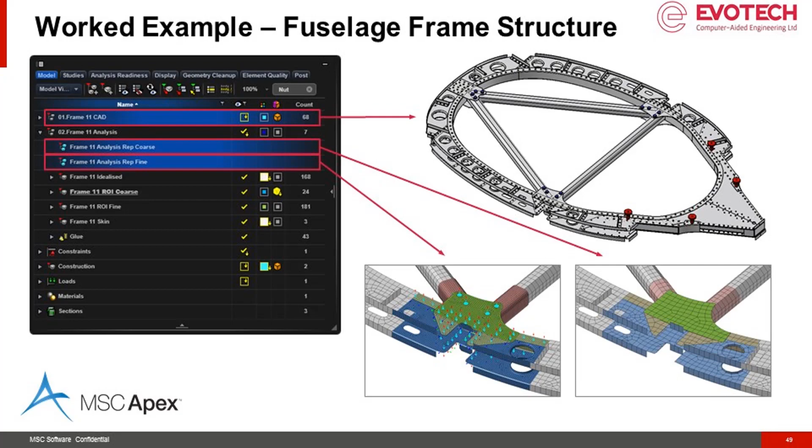We'll also look at the concept of a model representation, which allows for the build and analysis of different fidelity models in a single Apex database.

In this worked example, we'll go through a number of key stages. Stage 1, Model Assembly Definition. We'll demonstrate how complex CAD and model assemblies are imported, created, manipulated and viewed in Apex. Any parent-child entity, such as solids and mid-surfaces, respects the assembly architecture to allow ultra-fast manipulation for large models.

Stage 2, Sub-model verification. We'll look at how a discrete part is defined within the assembly structure for model checking and verification. Resultant Solve uses computational part technology to integrate analysis output into a full assembly level solution.

Stage 3, Full assembly verification and analysis. We'll look at sub-assembly integration and solve performed at many levels within the product hierarchy. Connector technology such as glue contact allows full model assembly for ultra-fast verification, analysis and or export to external FEA technology.

And then finally, Stage 4, model representation. We'll look at discrete model representation such as a coarse loads model and or a fine detailed joint definition, which allows models with different fidelity to be contained within a single Apex database. Results output can also be generated and assessed, which respects each model representation.

Okay, so we'll get started with the model assembly definition within Apex and look at some imported geometry. In the Apex environment, simply browse to the location of the geometry. We can bring in a single file or multiple files, in this case the frame 11 step file, which contains all the model definition for the assembly that we wish to analyse.

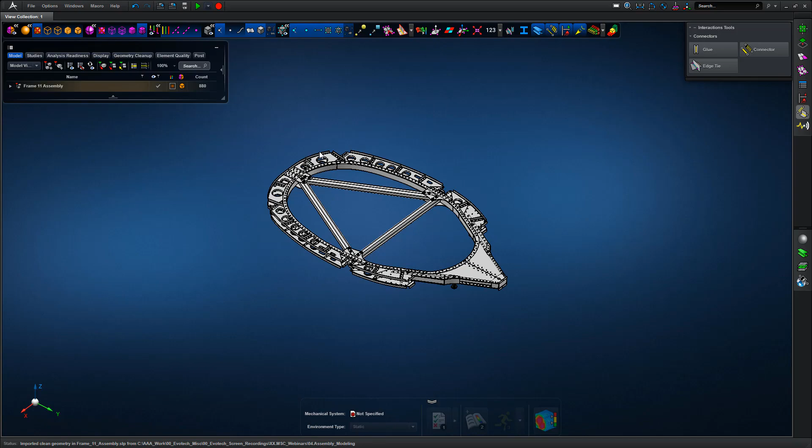So turning the solids on into view, as it were, we can see the full extent of the model. So we've got a typical aerospace thin-walled shell construction with lots of rivet, bolt and fastener detail in there, making up the full model definition.

In the model browser tree we can see we've got over 800 unique sub-assemblies, so a pretty complex, large model. We're going to use the information in the model browser tree. We're fortunate in the sense that the CAD definition has been generated very nicely with discrete names per entity or sub-assembly, so we're going to use the browser search function to pick out those entities and remove them from the structural assembly, as it were.

So first of all, we're going to create a new assembly. We're calling it fasteners. We're going to ultimately take out all of the redundant fastener definition for this first level model, and just leave us with the structural entities.

So based on the search string, we've got lots of split pins first of all. Using a split term within the search string, we can cut those entities out of the original assembly and then paste them into the fastener definition, or fastener container subassembly, to simplify the model.

So we're going to repeat this. We've now got rivets, so we can again highlight them with the search term, cut them out of the main structural assembly and then paste them into the fastener assembly, and we'll repeat that for the remaining fastener entities.

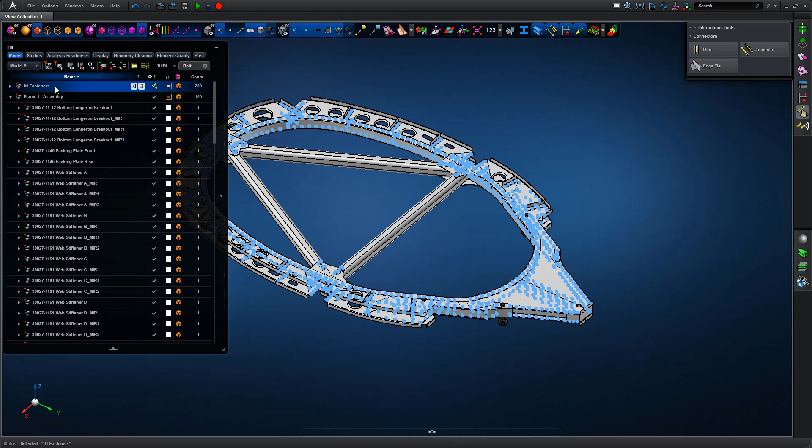We've got bolts and other fasteners in there which we can just cut out and move into the fastener assembly. So it's just a simple way of simplifying the overall sub-assembly.

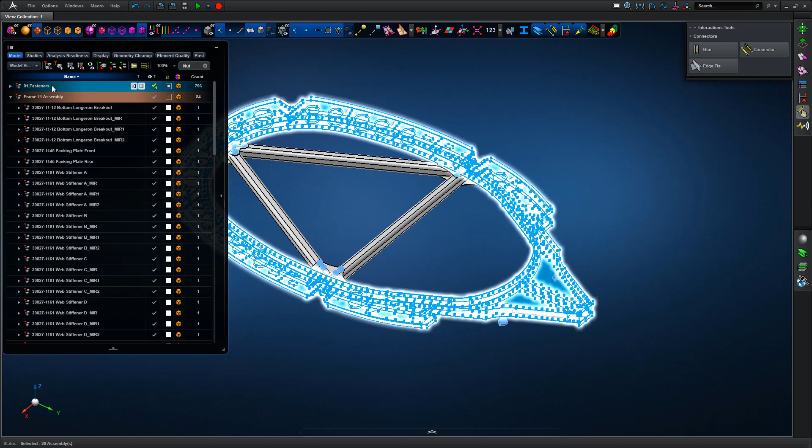We can do this by picking from the user workspace from a display perspective, but because of the search terms and the way the CAD geometry is set up, the assembly set up, it's very straightforward to manipulate this geometry, or the subassembly architecture, into a manner that we can control nicely.

So we're left with 64, I think, structural entities which make up the structural parts, so we can just cycle through those in the model browser tree.

And if we change the color of the fastener assembly and then just look in the workspace, we can see now we've got things like split pins, nuts, bolts and rivets all highlighted in red, and we can effectively remove those from the assembly architecture to make our modeling and analysis task much more straightforward.

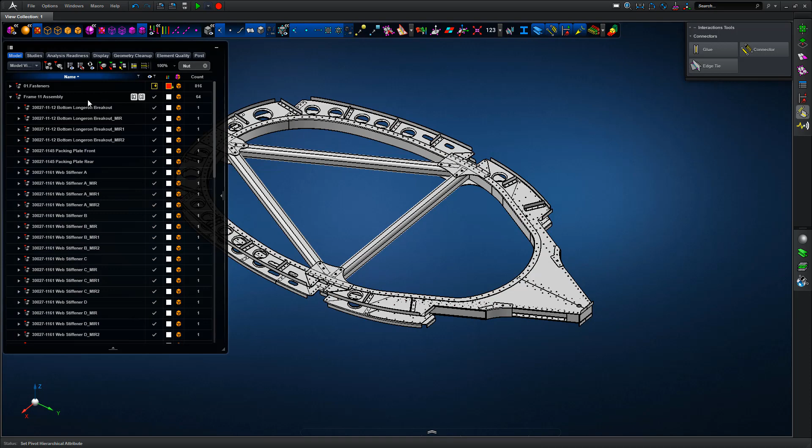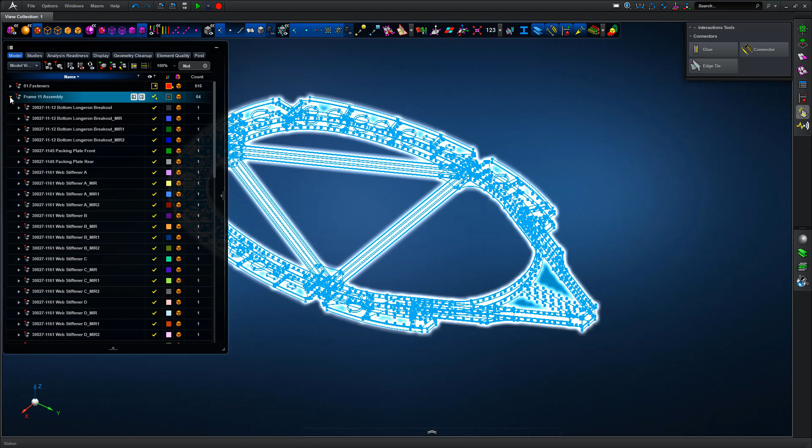So we take those out of view, and then we just show the frame 11 assembly, which is going to become our structural target for the structural model build, and we've got all of those structural components highlighted. We can auto color each entity within the tree to give us a unique color per part or subassembly, giving a nice simplified display of the overall definition.

Looking at a particular part, we can hover over it, right click and use the option center in browser, which takes us into the specific tree location showing a subassembly with a part underneath it and a solid body contained within that, so we can interrogate that particular part.

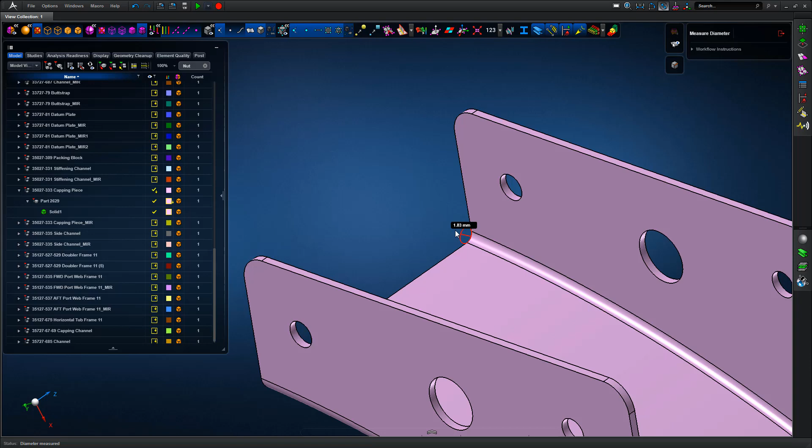In this case we're going to use some of the measurement tools to measure a fillet, and we'll use that dimension for a subsequent defeaturing operation, which we'll be performing on the full assembly.

Remember, we've taken out all the fasteners, so we're effectively reducing the complexity of the model, or simplifying it, and we can see how some of those fillets are controlled in specific areas of each model.

Once we've got an idea of the geometric dimension, we can defeature all of the subassemblies in one hit. So select the entities from the model view space, and then go into 3D fillets.

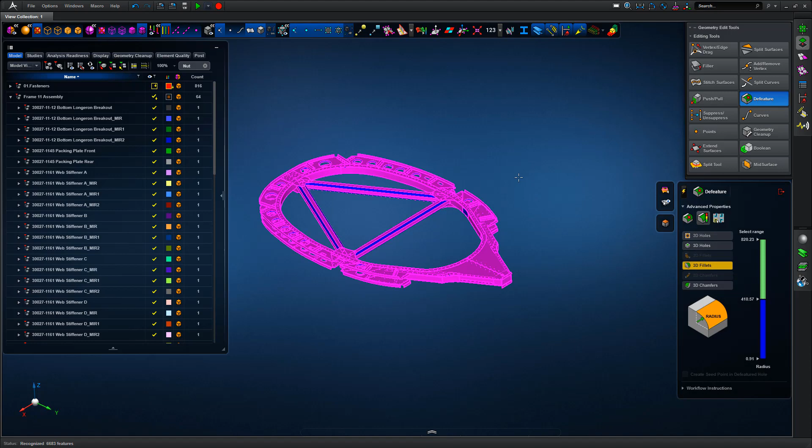We can see in the fringe on the right hand side that Apex has highlighted two sets of fillets, some coloured blue, some coloured green, so we can change the range dimension, making it more appropriate for our defeaturing operation.

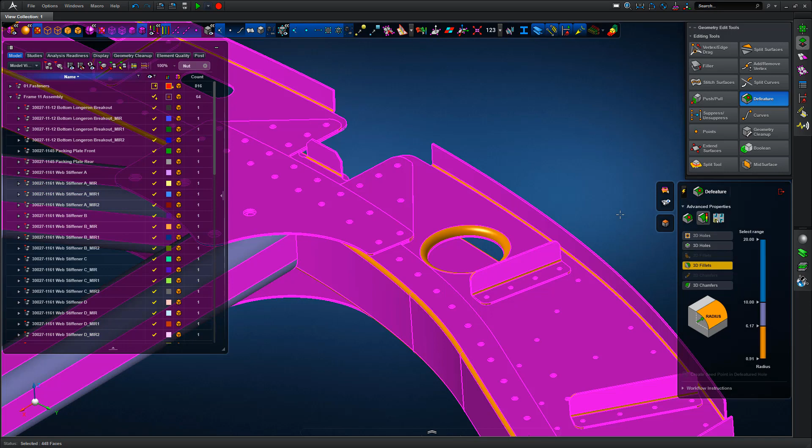We're going to set a control with 7mm in the range, so any fillet larger than 7mm, such as those on the struts shown on the left hand side, will be maintained within the model, and any features less than 7mm radius will be removed.

Just highlighting those in orange, then middle mouse button to accept, and Apex runs through, cleans up the geometry and defeatures all the fillets of less than that chosen dimension.

So it takes a little bit of time to perform the operation, and then we can come out of the defeature tool and see what we're left with in terms of the overall geometry.

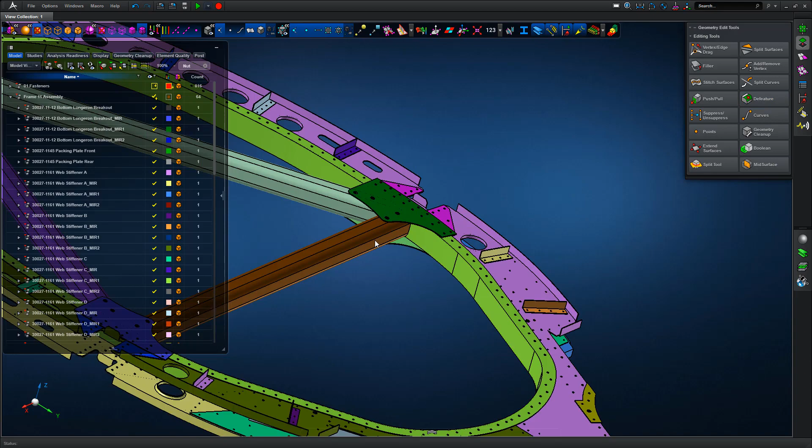Zooming in, we can see that for a couple of those regions the fillets have disappeared, and this again makes it a simpler operation for the mid-surfacing we're about to perform.

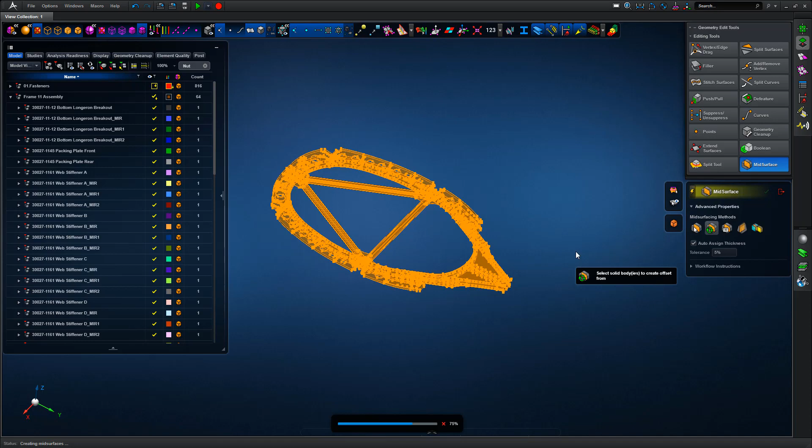So we're going to use the mid-surface or single thickness solid with the auto assign thickness checkbox turned on, and perform the mid-surfacing operation. Apex creates the mid-surface and also the subsequent shell thickness property based on the original solid definition.

A very nice way of working quickly with the model, and we can see a fringe plot of the resultant thicknesses.

We can turn off the solid and show the free edges. These are the mid-surfaces that have been created, and each mid-surface is contained within the parent subassembly part where each solid was defined that was used for the underlying mid-surfacing operation.

So we're just going to center it in browser, look at the discrete part definition, and then move the adjacent mid-surface that's created, looking around in the model browser tree for the adjacent paired surface.

Just turning on a couple of parts to get the entity that's required. So there we go. Currently, those surfaces, pink and green, are contained in two separate subassembly collectors.

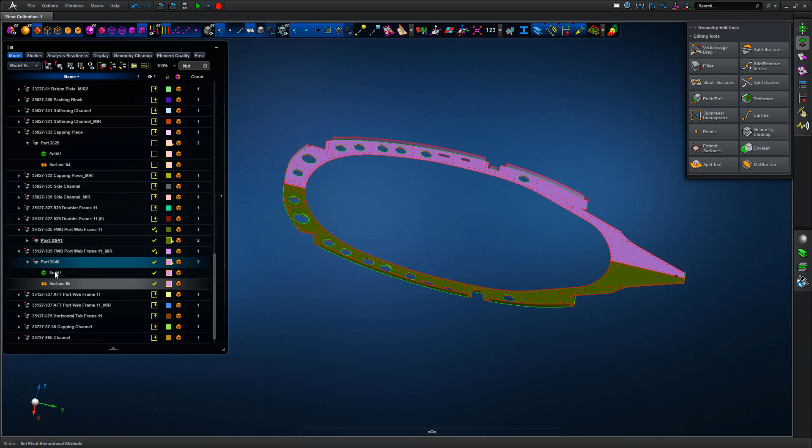So we're going to copy, cut and paste the solid and the resultant mid-surface into a single subassembly. You can see that by the fact that both entities are now the same colour and contained under that unique subassembly. And if we put the full assembly on, we can see how that manipulation has been defined within the full assembly.

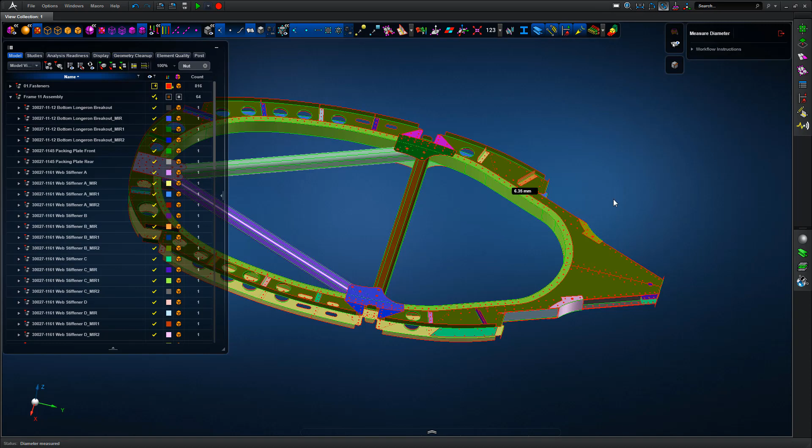Measuring some of the hole geometry, we get the hole diameter of 6.35 millimeters, and we're now going to defeature all of those surfaces to remove the 2D holes, again less than 6.35.

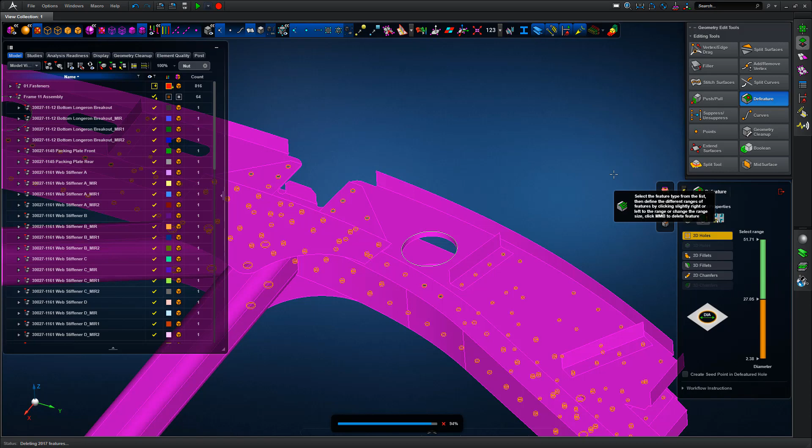Apex has done a good job highlighting the small and large holes. We're going to leave the larger holes, and all of the holes defined in orange in the fringe plot on the right hand side, simply select them and then middle mouse button to accept, and Apex will remove those from the resultant geometry.

Another step towards cleaning up the geometry to give us the resultant target geometry for meshing. Once we've done that, we can perform surface meshing at 10mm element edge length with the auto meshing algorithm turned on, and on a quick look we can see that's a reasonably appropriate element size for this type of structure. Then we look at the element quality and show some areas of the model with poor element quality, where the check is showing failed.

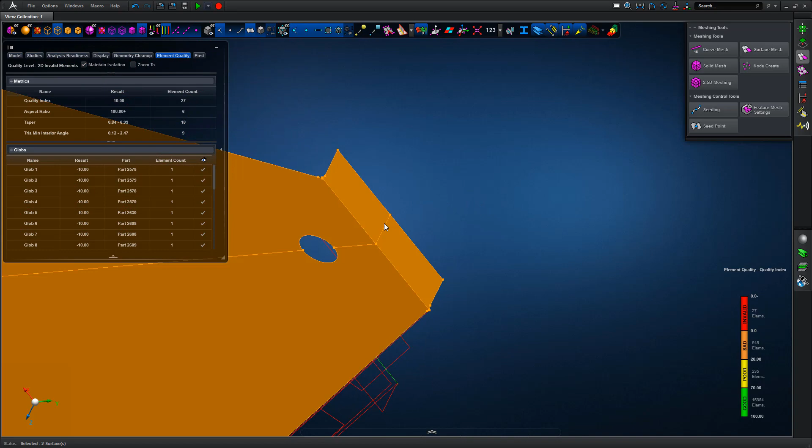We would not be able to run an analysis with such skewed or highly irregular elements. So it's a case of looking through the model and understanding where those poorly defined elements are, usually a function of bad geometry or overextended mid-surfaces.

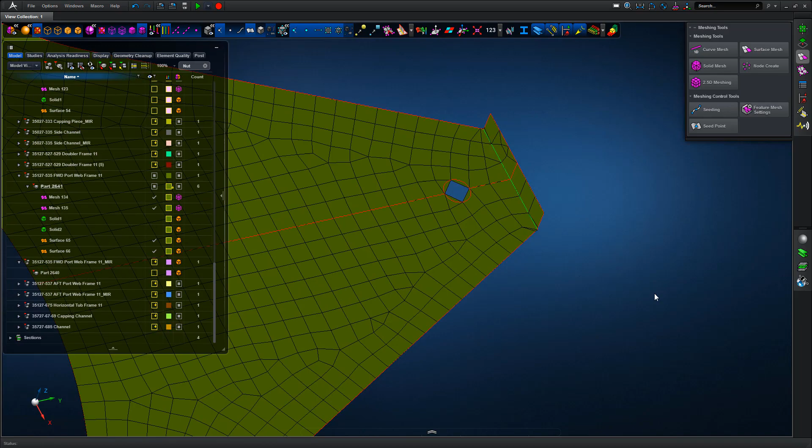Now we're going to look at one particular area of interest, the green surfaces we picked out earlier. If we isolate in the browser, under that part we have two solids, two surfaces, and two unique meshes, and the red line at the interface between the two surfaces shows they're not currently stitched together. So we're going to stitch them, and we can see in the model browser tree we now have a single surface and a single mesh for that representation.

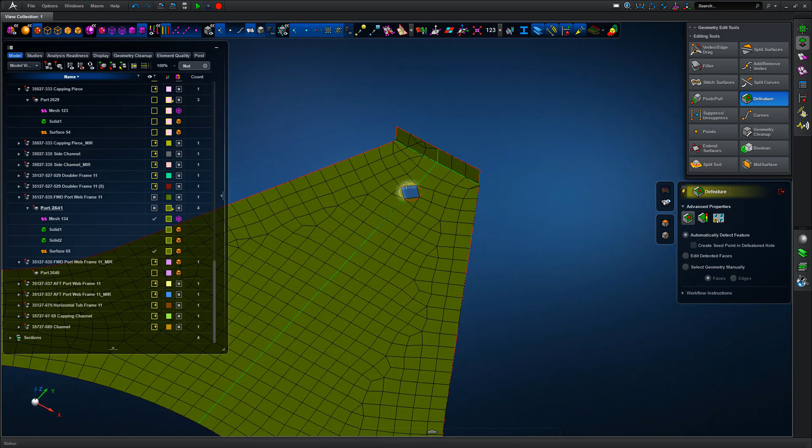Defeature on a manual basis now to remove the hole, and we can see as we defeature the mesh updates. Turning the element quality on, we can start to make sense of this mesh geometry and definition at the single part level.

Following the defeaturing operation, we're now going to use the vertex edge drag tool, so we can see the guidelines, and it's simply a case of manipulating the geometry. The mesh and element quality automatically update, so we've got almost real-time feedback for any model manipulation at this level. This is a very quick way of using the direct modeling geometry engine within Apex to get to where we want to be with the model topology quickly.

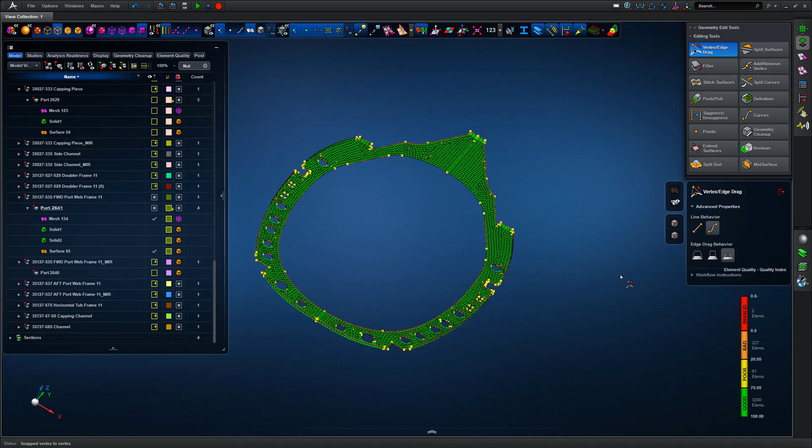So we repeat that for the obvious areas, and then we can isolate and enhance any other areas. Basically that posts to screen only the failed elements and the geometry they belong to, and then we can again use the vertex edge drag.

We can see that the mid-surfacing has just created a couple of extra vertices where the original fillets would have sat. If you remember, they were there before we defeatured, so it's just left some vertices behind. So we do that defeaturing operation.

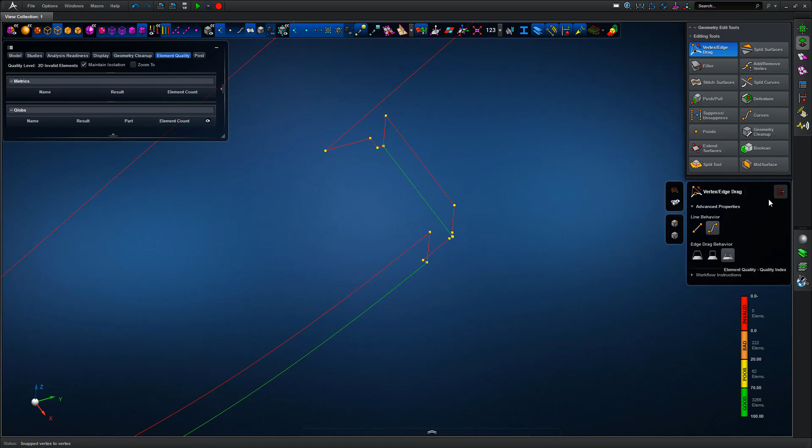On the left hand side, the model browser tree shows that in terms of element quality we now have no invalid elements anywhere. We have some poor and bad elements, and we could take time to understand where they are, but in terms of our loads level fidelity, we're perhaps not so concerned about local detail at this stage. We're just trying to get a mesh on the structure to allow us to understand the overall stiffness and load path.

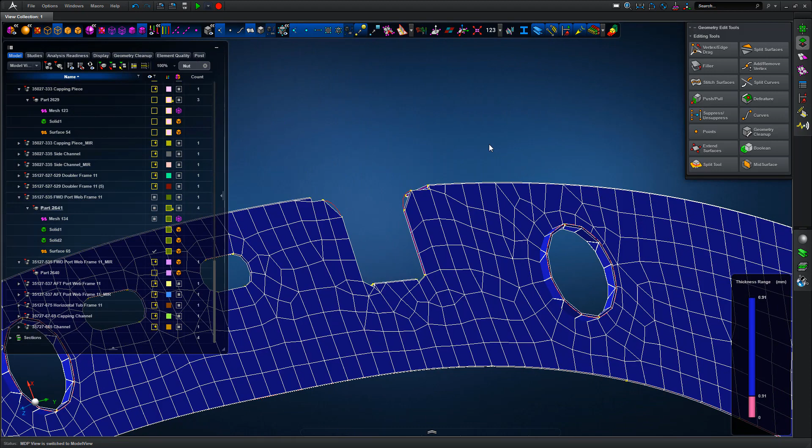So checking the element normals and normal consistency, then looking at the shell thickness. If you remember from the mid-surfacing operation, we had auto thickness turned on, so the shell properties have been populated by that auto thickness parameter, and we can look at the solids overlaid over that resultant shell mesh definition. We see we've got a perfect match in terms of the shell property to 3D CAD thickness.

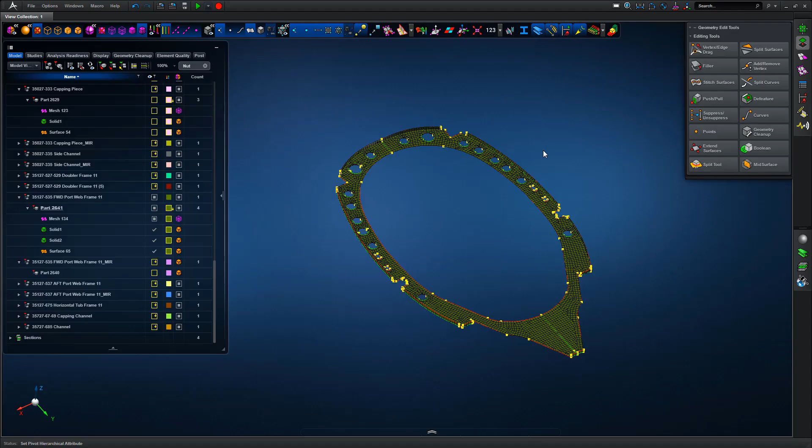So very straightforward. Once we have that single part or single subassembly defined, we can verify the model response at this level before we look at the overall assembly definition. This is one of the unique things about Apex, that we can quickly perform a subassembly verification. In the model browser tree, just right click on the subassembly of interest and place it in the analysis scene, which sets up the job parameters.

So we need to first define the material. We've got an aluminium 7075 definition with elastic modulus, Poisson's ratio, and importantly the mass description, because we're going to run a normal modes analysis in this case. By default it's set to a static analysis, so we've got an analysis verification flag saying we have no loads or boundary conditions. For normal modes we don't need those, we can just perform a free modal analysis.

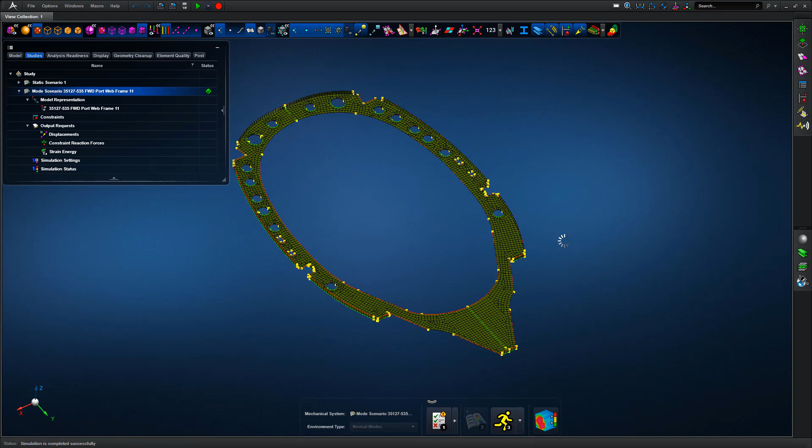So run through very quickly, and we can see the analysis response based on the single subassembly that they're interested in. So going into post-processing, and we can see we've got mode 7, which is the first elastic mode for a structure that's tied together properly. We can see the deformed shape.

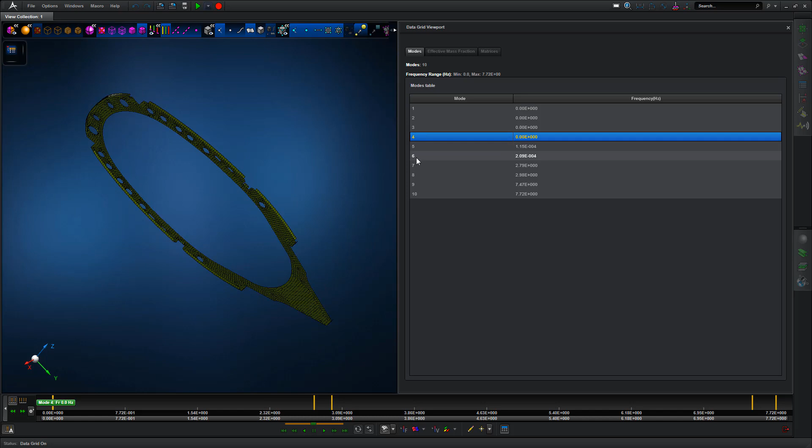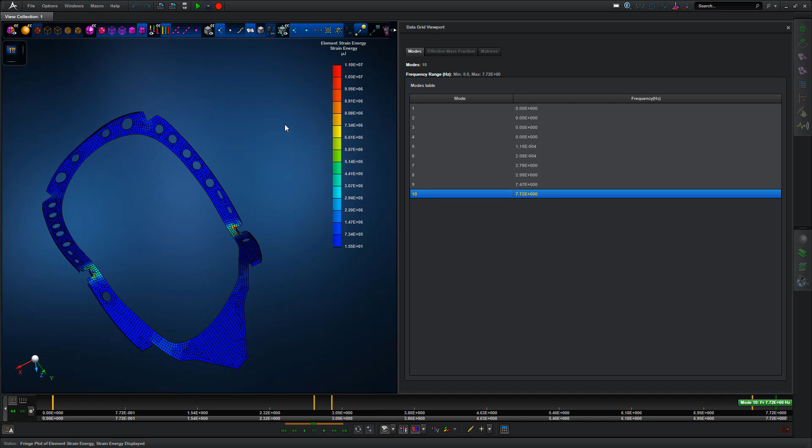We can look at fringe plots in terms of deformation and/or strain energy to allow us to assess what's going on. So turn the fringe plot on and switching to strain energy, and we can see the 7th mode, which is the first elastic mode again, shows a sort of hinging effect where we've got a lack of stiffness in the overall model, and we can cycle through each discrete mode and make sense of the model response.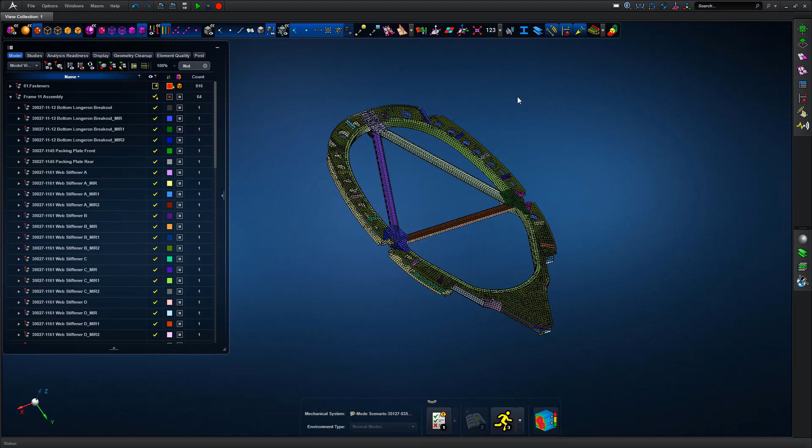So what Apex does, it uses the concept of computational parts. So based on subassembly verification, we can see this for an example jet engine. Every verification that we do is stored within the assembly architecture and then can be reused for subsequent analysis at the master assembly level, and ultimately that gives us a huge increase in efficiency in terms of the overall way in which we work with the assembly, both verifying at a subassembly level and then effectively merging those subassemblies together for the full assembly definition. So we're using that concept in this example.

So bringing the full model structure back into view, and again using the element quality index just to show where we've got some elements which have failed the element quality checks. So I think we've got 23 failed elements at this level.

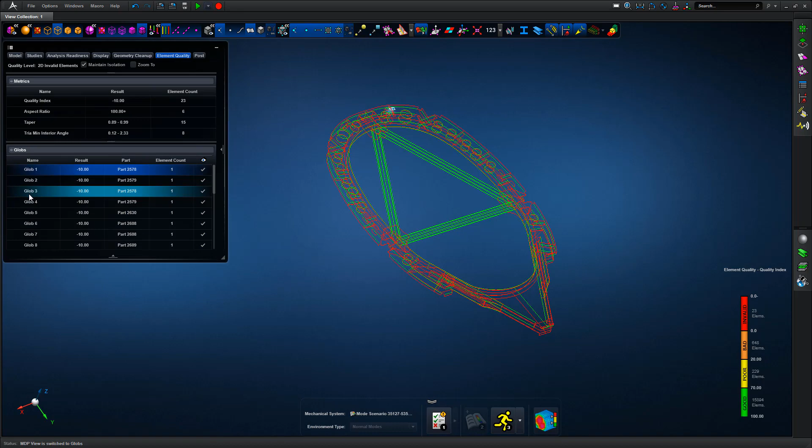So we can just work our way around each particular failed region within the model browser tree, which is showing us each overextension of the mid-surface as a glob, a term used, and we can look through each one of those globs, as it were, to isolate and enhance each particular region where we've got poor element quality. So just cycling through the model.

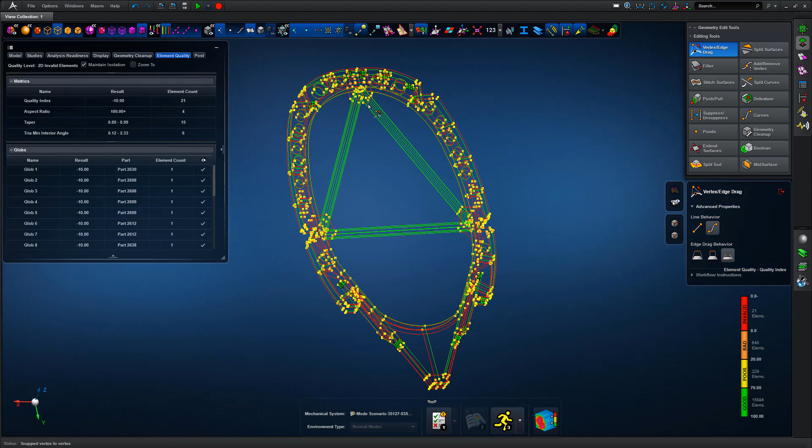I'm going to skip a couple of steps in a moment, but just giving you an indication of how you work on the subassembly and a full assembly definition in terms of element quality, and we can just work our way through. So just jumping a couple of steps there and just tidying up the remaining two poor quality regions. And again, these are all just slight extensions of the mid-surfacing operation.

We could perhaps tailor some of the mid-surfacing operation to work in a slightly cleaner manner, both from a defeaturing and a resultant mid-surfacing definition. But obviously we just hit this model with quite a broad set of parameters just to show the overall technique that we would use for that definition. So we've fixed the failed elements.

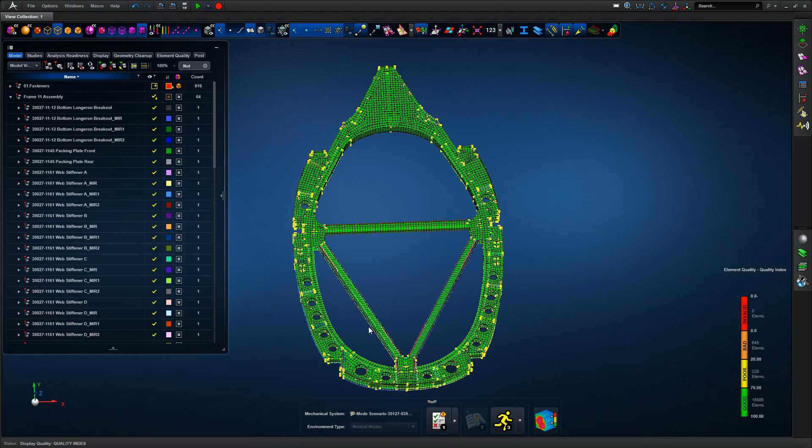Now we can isolate some of the poor quality regions. So if we look at a couple of these struts, we've got some pretty skewed quad elements, so we're just going to isolate a couple of those struts from view and just operate on those single entities, as it were. So we're going to look at some of the sketcher tools. So we're going to create a new part

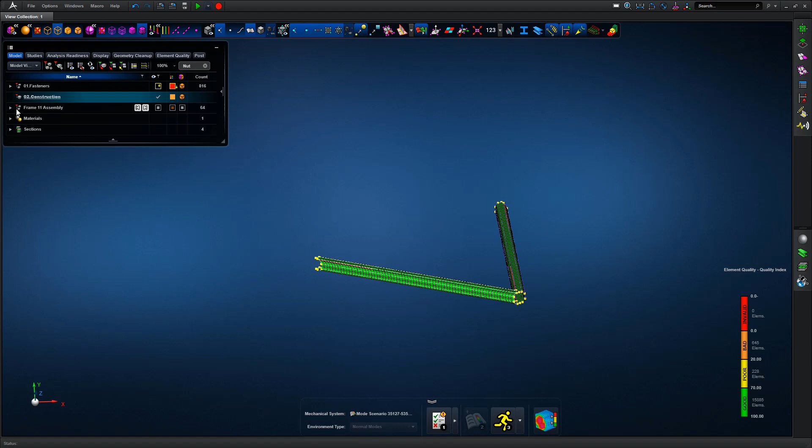construction, as it were. So any geometry that we use for creation or splitting or manipulation of geometry, and the resultant mesh, is going to end up within that construction part. So we're going to sketch tools, and now we're just going to simply sketch on a plane a simple rectangle which we're going to use for cutting the components on screen.

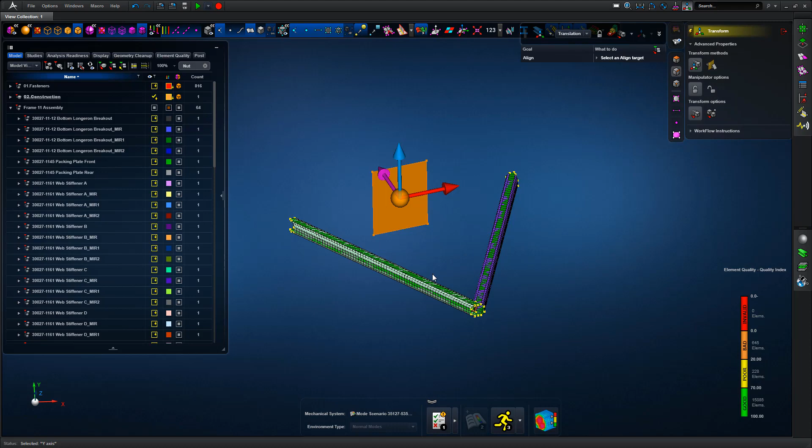So once we have that geometry defined, just turning the wireframe off, showing us the rendered view, and then we're going to move or transform that cut surface into a position which is normal to the strut representation. So just manipulating some of the transformation tools just to bring the cut surface into the correct position.

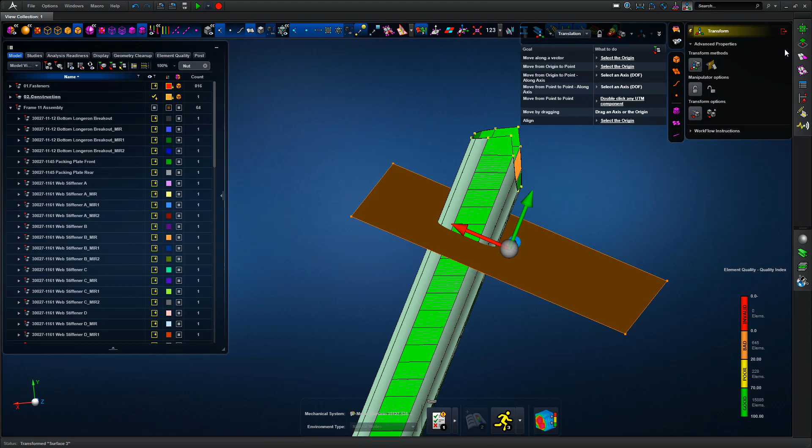And we can see it's just a simple drag and drop operation, so we're not having to define coordinate frames or vectors or anything like that for the movement. It's all done from a mouse manipulation perspective, as it were. So we're going to split those surfaces and modify the underlying mesh definition. So split the surface, split the strut using the cut surface, and we can see the mesh is updated,

and then just move that transform object, first of all setting the vector normal to the surface, so we're moving in the correct orientation. Again, very quick to manipulate the handles on these transform tools, or transform and rotate tools for that matter, and then move to the new location where we want to cut the mesh, and again go back into geometry edit tools, split surfaces.

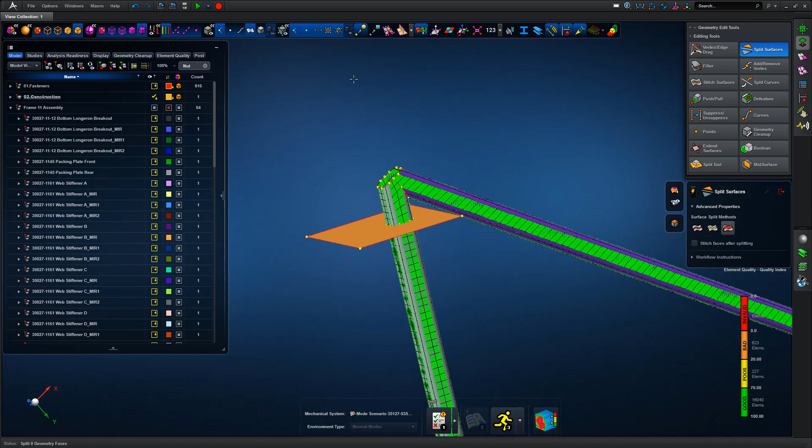So we're going to split the strut surfaces again by the master cut surface, and the mesh is updated. The quality index is updated as well, so we can see in real time the effect of the manipulation that we've got within the model.

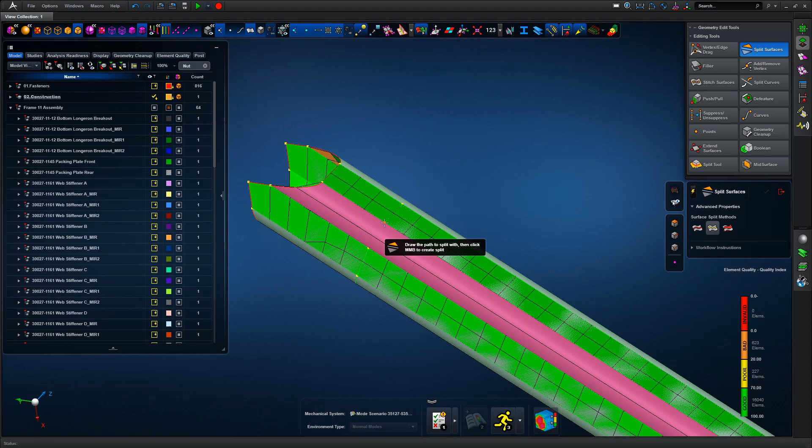So a couple more edits we're going to make. So we're going to split based on a curve rather than a surface. So pick the surface of interest, pick the two ends of the curve, and then middle mouse button to accept. The geometry split, the mesh is updated, and the quality index is updated as well. Again, so just repeating that.

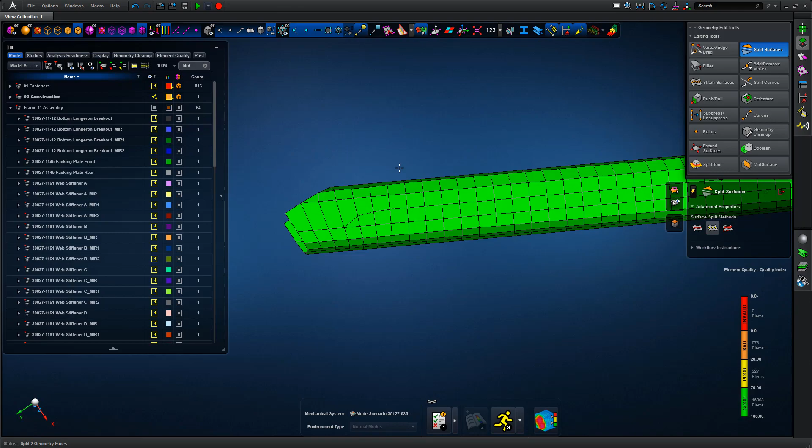So again, sort of standard mantra of Apex, but the direct modeling tools allow us to do very, very fast model edits. One thing that's going on in the background as well is that the shell properties are updated for this strut as we manipulate and modify the structure. So again, you can see there we've got some much improved mesh definition for that, and we can repeat that for the bulk of the structure to give us the mesh definition that we want. Again, just running through this pretty quickly in terms of the demonstration.

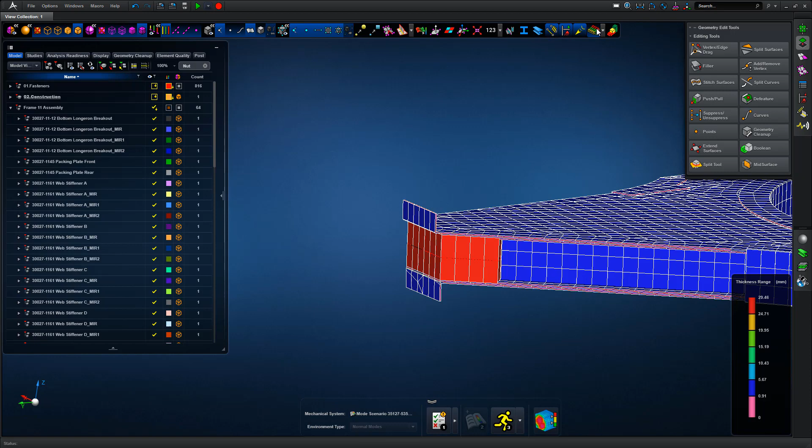So once we've got those mesh edits done, we can check the shell thickness definition. So by putting the surfaces on and looking at the 3D representation of shell thickness, just working its way through for this set of property sets. So we can see, yeah, we've got one shell which is very much thicker than the rest of the shells.

So looking at that in detail, we can see there the mid-surfacing operation has mid-surfaced basically a thick solid, which doesn't lend itself well to the shell definition. We could probably get away with it from an analysis perspective, but wouldn't get very good results or stiffness definition or even connection definition at that interface.

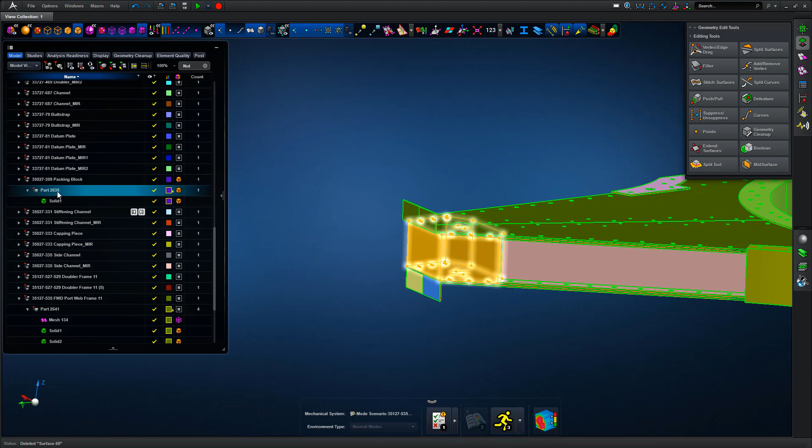So just looking at the solid that's defined in the first place, and again turning the hex meshable colours on, so we can see this is green, so it is hex meshable straight off the bat, as it were. So you can see the resultant mesh definition. So just putting the mesh into wireframe, and then we're going to defeature just to remove some of the holes.

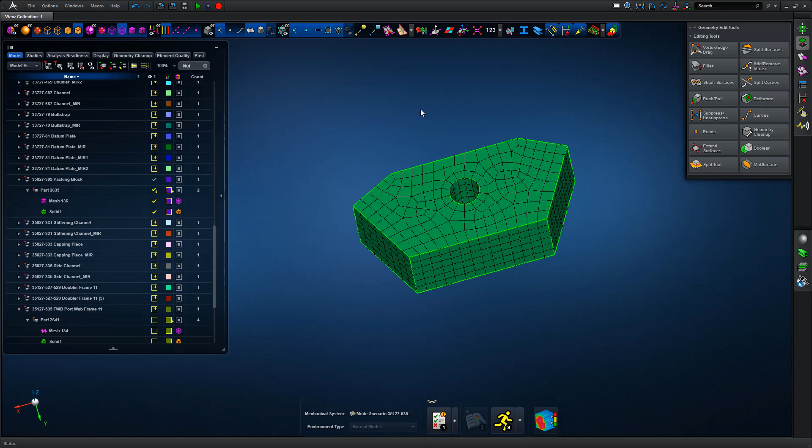So again, manual approach, just pick the solid faces which we want to remove from the overall definition, and again the solid is updated, and the mesh is updated in line with that as well. So again, huge time savings in terms of the overall definition. So we could check the element quality, but it looks pretty good to go as it currently stands, and we're happy to go with that representation.

Okay, so once we've got the full assembly defined from a mesh perspective, so we've got all the thin shells manipulated, quality checked, and properties assigned, and also thick shell or hex mesh for the thicker regions, we can now glue the full assembly together. So using the default glue pair tolerance of 5mm, that looks for entities within that tolerance and glues them together.

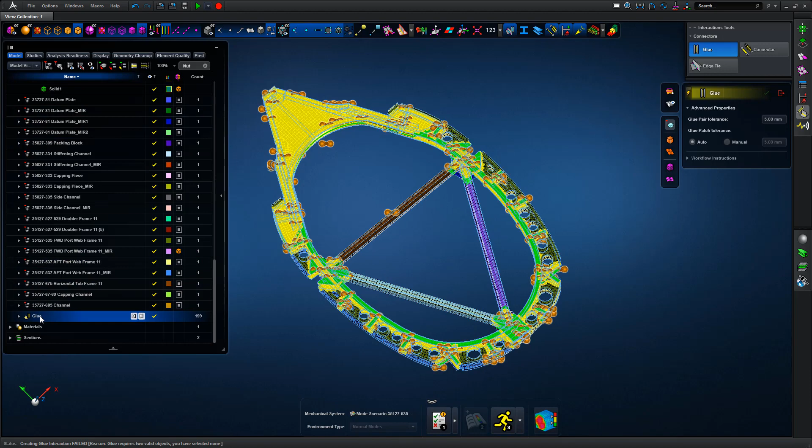You may well have seen one of the previous tutorials or webinars where we looked at explicit connector technology, and part of that was focused on the glue, which is effectively an internal MPC definition defined on an MSC Nastran base level. So once we've got those controlled, we can view each glue pair, so a connection between two parts or sub-assemblies, and cycle through the definition within the model browser tree.

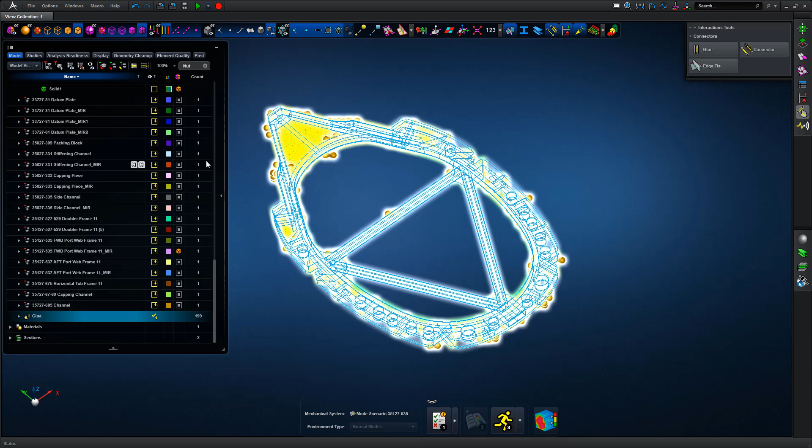One thing I'd say is that the glue technology does consider the extreme fibre surfaces of each shell element. So if you've got two solids butting which are represented as shells, it will glue them together correctly. So once we've got that model definition built, we can look at the full verification and analysis of the structure.

So from an assembly level definition, just place an analysis scene for each, or the full assembly as we require, and we can see analysis readiness has thrown up that we haven't got a material defined, so we can simply assign the aluminium 7075 material across the full structure, and we're now good to go from a normal modes verification run perspective. So we run the analysis.

And again, if you remember, I was talking about computational parts earlier. So any parts, any sub-assemblies which we've verified in the background or prior to this point, that structural or matrix definition, if you like, from an FEA perspective, has been stored internally and will speed up the full solve.

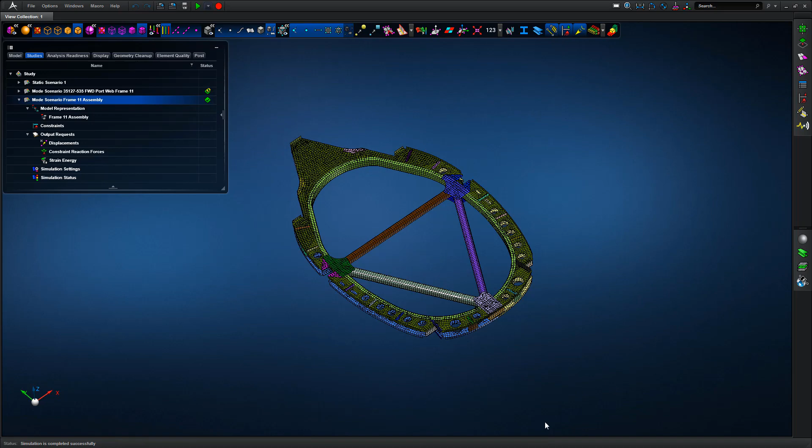So if we wanted to, we could go through each discrete part or sub-assembly and verify on their own basis, and then when we bring them together, the analysis time is far reduced over a raw analysis, as it were.

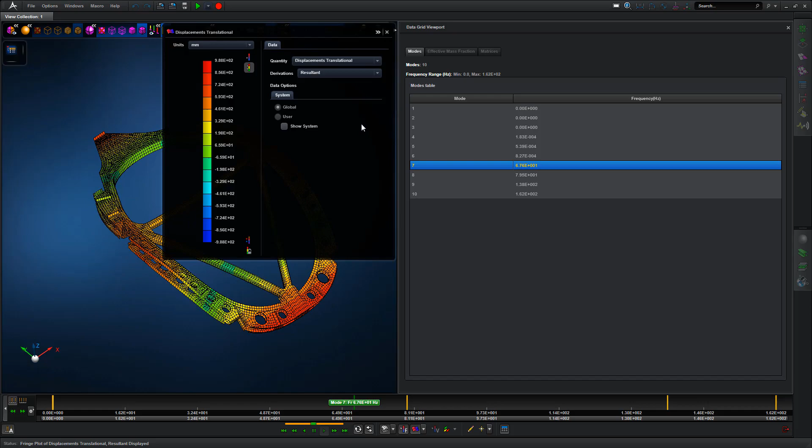So again, looking at the elastic mode response, so mode 7 and above, so mode 1 to 6 are rigid body modes with very low frequencies, and so looking at the mode 7 response, and again displacement, we can look at strain energy as well as a further check, but we're pretty happy with that definition. Everything's tied together, and the structure's moving with a clean definition, as we'd expect.

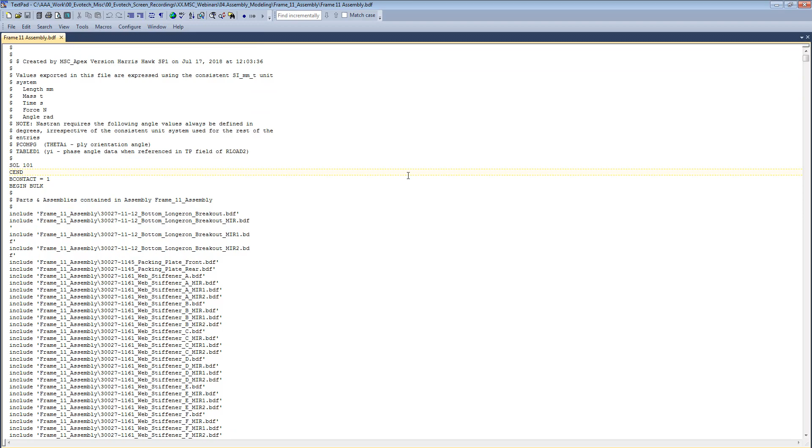So once we've verified the model, we can export the full model definition, and we're turning on the hierarchical export, which basically creates a series of include files which are defined to mirror the sub-assembly architecture. So again, if you look in detail, and those who are familiar with the Nastran deck definition, all of those include file definitions are defined in the Apex product structure. So we've got a very close tie-up between the two representations, which can have significant advantages from a Nastran or an MSC Nastran solution perspective.

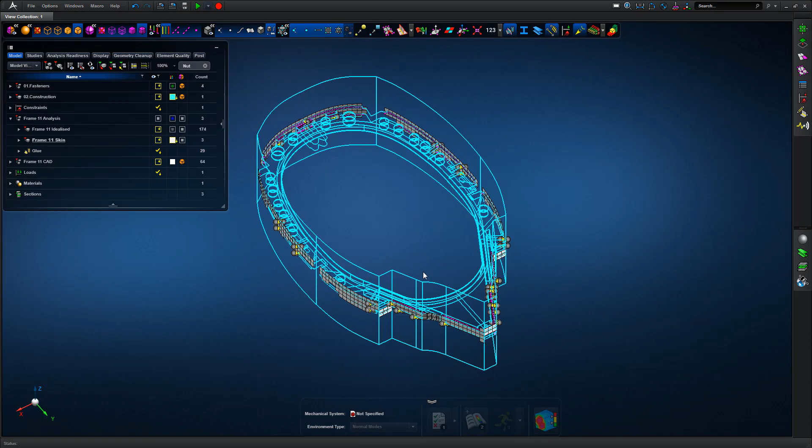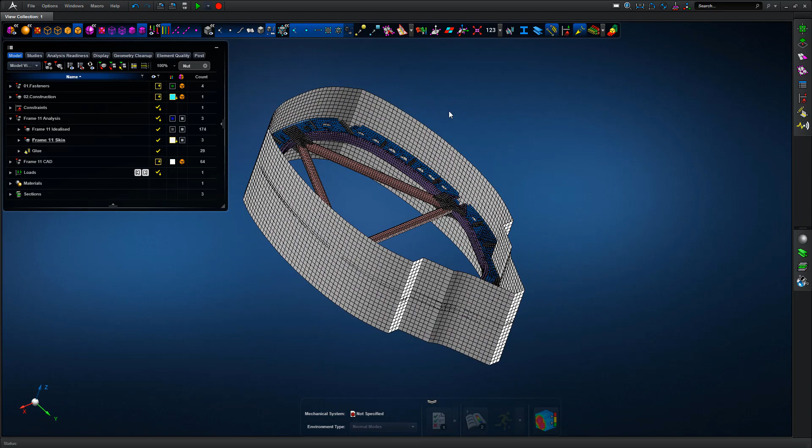So once we've verified and potentially exported the model, we can integrate the analysis assembly into a larger definition. So in this case, we've got a fuselage skin defined, and we glue the original assembly into the skin definition, and again, one of the previous webinars goes over the glue technology from a mechanics perspective in terms of load transfer, both for force and moment.

Defining a pressure condition, so we've got external pressure defined on the model, just skipping over that very quickly, and then running our first true static load case. So we had a constraint in there as well to stop the model flying off into outer space. So running through that, and again, we've got a very thin fuselage, so this is just an example, but it highlights the way the load transfer is moving into the fuselage frame.

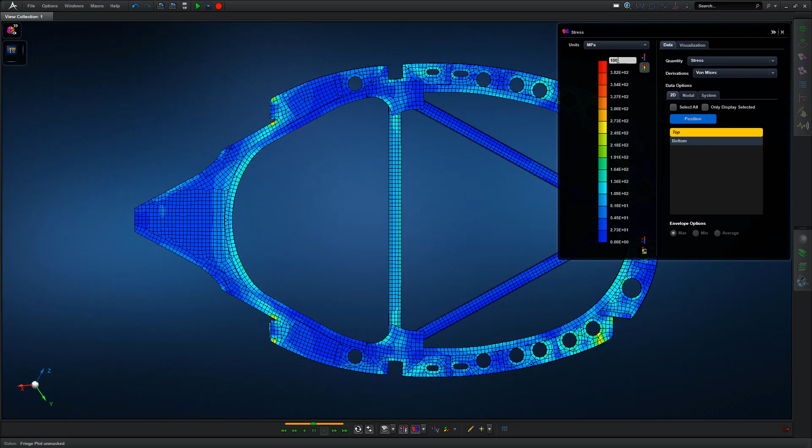So taking the fuselage skin assembly out of view and post-processing based purely on the overall original sub-assembly, we can see by looking at the von Mises stresses and putting in a 200 MPa limit, which might be appropriate for the stress limit that we've got defined for the structure, and we can look at the major response and how the load is being tracked or distributed through the structure.

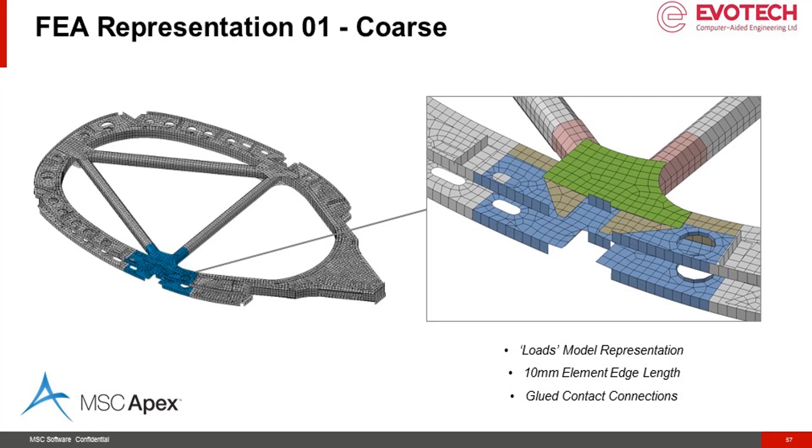So moving on to model representation within Apex, which allows us to look at models with different fidelities in a single database. So the CAD definition for this particular fuselage frame, and we look in detail and maybe some of the output from the original analysis, we can see we've got a joint of interest. First of all, FE representation 1, coarse model definition, loads model with a 10 mm edge length and glued contact. We're going to run through the setup of the first model representation, and then look at a more detailed joint representation as a second representation, again within the same database.

So first of all, we're going to use some of the sketching tools to just cut or chop, for want of a better term, a portion of the original assembly definition out to create a region of interest assembly and control that using whichever means we need to within Apex. So first of all, sketching a surface normal to the cut. So once we've got that, we're basically splitting this surface in a manner which will allow us to cut the overall grey assembly shown on screen now.

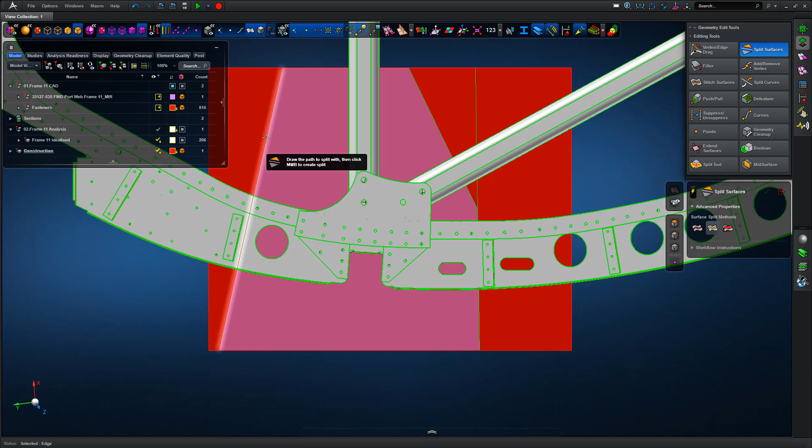So if you just bear with me, the cuts will make sense in a moment. So I'm just cutting out the cut plane, the cut surface geometry to allow us to chop the white or grey subassembly. So just using the split surfaces point-to-point option. So once we split those surfaces, we can then delete the surfaces we don't need. So again, just selecting in the viewport and deleting, and we're left with this profile surface, if you like.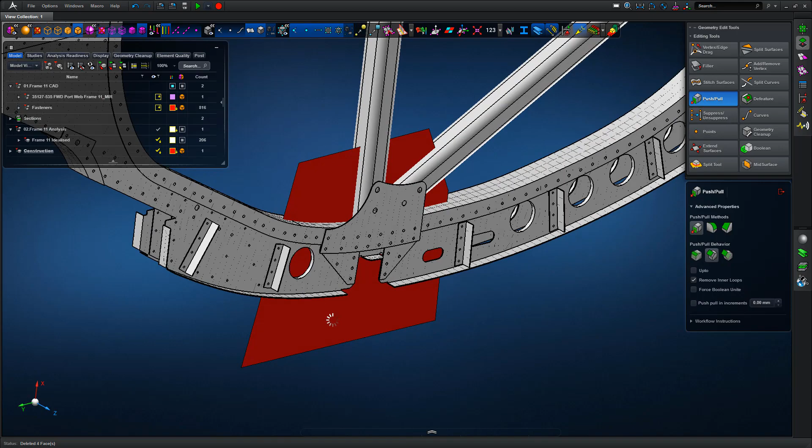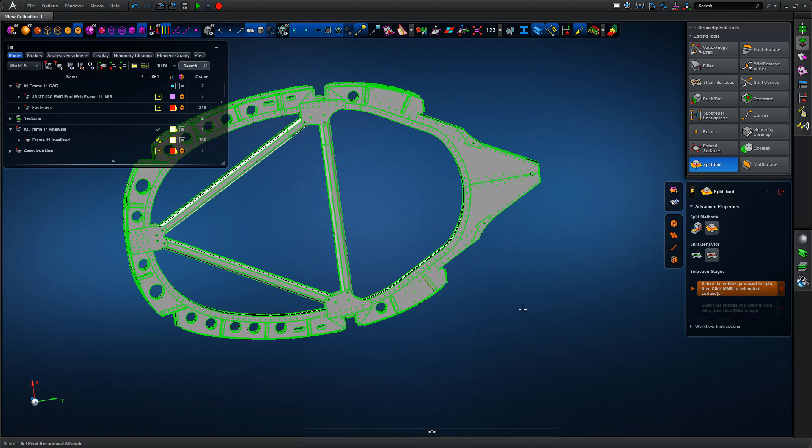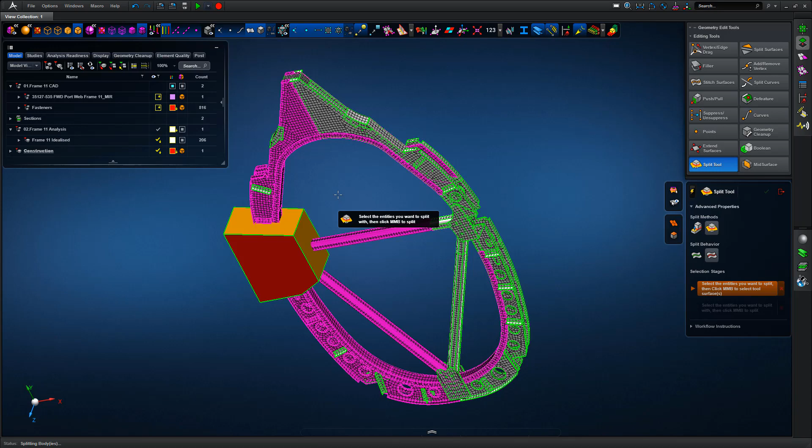So we're now going to push-pull that surface into a 3D form to create a bounding box for the region we're going to cut from the original assembly definition. So using the split tool, we're going to simply highlight the entities. So this will be solids, surfaces, and the underlying shell mesh based on that bounding box definition. So picked all the surfaces in the region of interest, and then highlight the cut surfaces just from the 3D solid, and then middle mouse button to accept. And Apex has made those cuts and updated the geometry mesh and underlying assembly architecture to reflect those edits.

So once we've got the region cut, we're going to create a new subassembly which we're going to define as our coarse model representation for the resultant analysis definition. So we're calling this frame 11 region of interest coarse, and the reason for doing this will become clearer in a moment. And then we're going to select as a screen pick all of those entities.

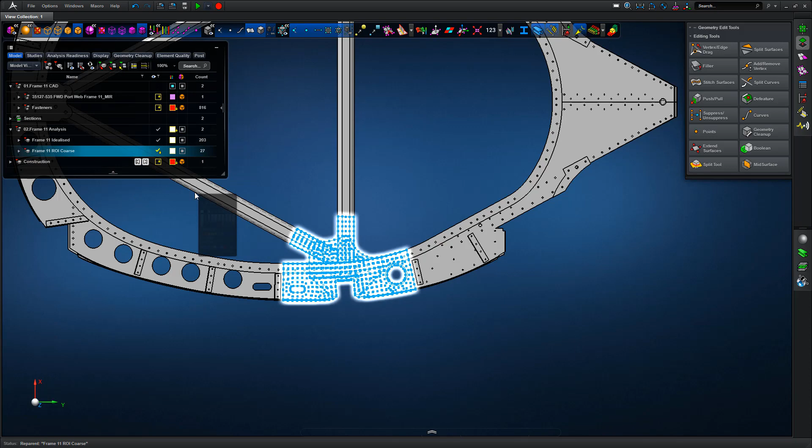So we're going to cut and paste them into the model browser tree, and if we change the colour, we can now see that those entities now belong to a different subassembly. So we're going to move those into the overall subassembly. So frame 11 analysis is the master assembly, and underneath that we've got frame 11 idealized shown in grey or white, and then frame 11 region of interest coarse shown in blue.

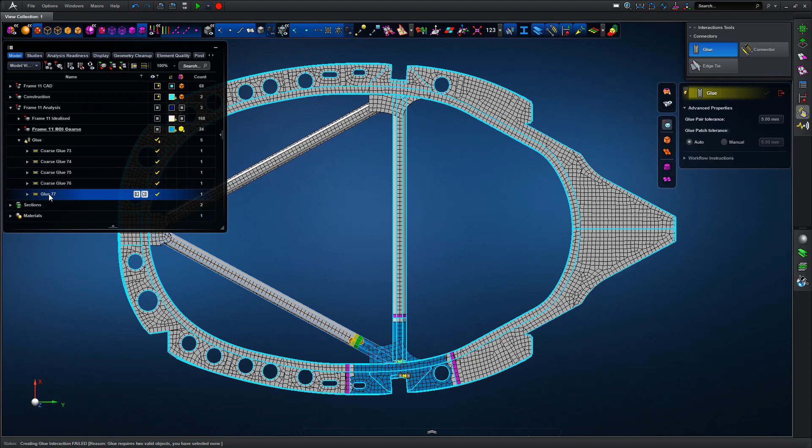We're now going to glue the structure together at the interfaces, so it's just giving us a message saying overwrite or ignore any underlying glue definition. So we're going to ignore those, and then we can look in the browser tree and rename the glue definitions between the larger white subassembly and the region of interest blue subassembly, and we can look at those glue patch definitions accordingly as well.

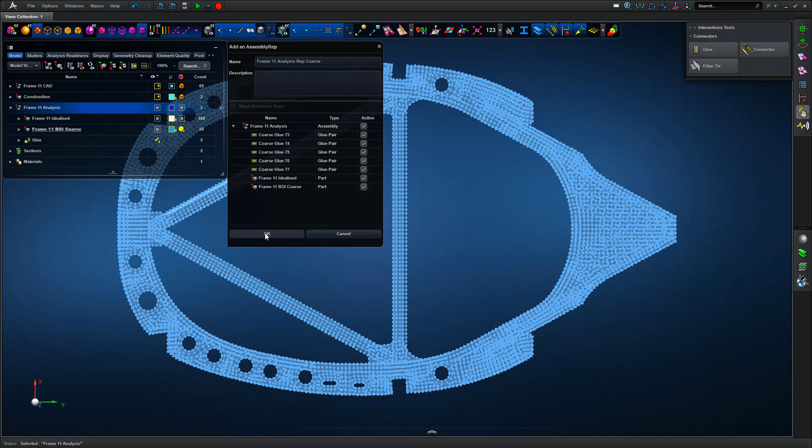So once we've got those defined, we can just right click on the overall assembly definition and create a model representation, in this case frame 11 analysis representation coarse, and we're happy with the structural definition and also the glue contact definition at that level.

So we're now going to move on to our second representation. So we want a much more detailed joint model representation at the region of interest. So we're going to have a finer mesh, in this case 3mm edge length, and then we're going to use discrete fasteners to tie things together.

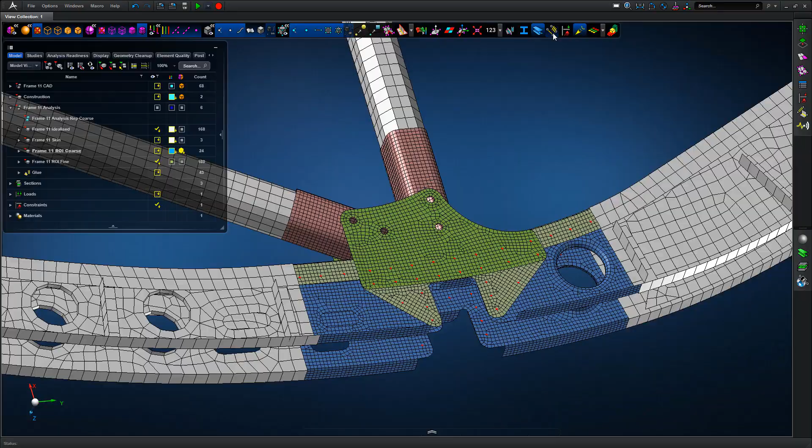So we've made some geometry edits and cuts using the standard Apex functionality, similar to what we've shown in some of the other tutorials or webinars, but we can see now we've got a different fidelity model altogether, and those are the fasteners shown. We've used one of the Python scripts to develop those fasteners very quickly, and we've created the glued contact.

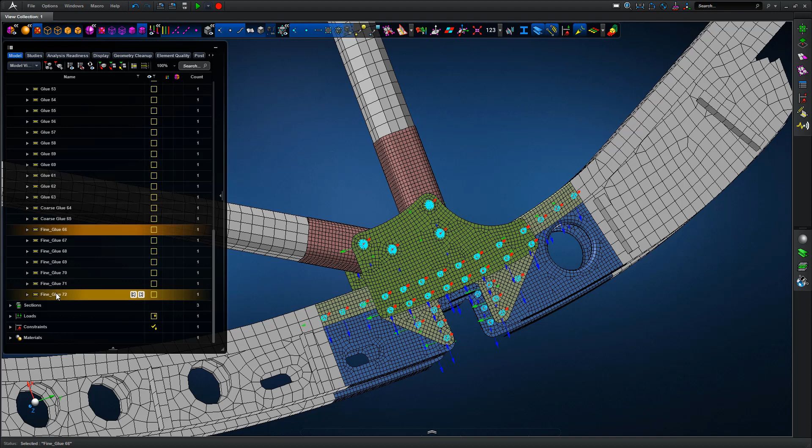So if we look in the model browser tree, our assembly contains both the coarse model definition and also the fine glue contact definition. So if we just show those in view, we can see the glue between the coarse and the fine model representation at this stage.

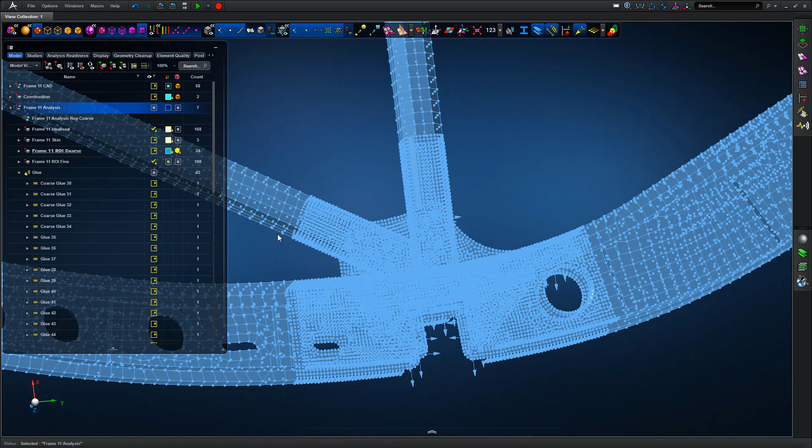So once we're happy with those, we can go back into the frame 11 analysis subassembly and create a new representation. So this time we're going to call it frame 11 analysis representation fine, and we're going to check off the coarse glue representation, and also the frame 11 region of interest coarse. So we've taken out the structure for the coarse model and also the glue for the coarse model. So effectively we've got our model representation, which now does not consider any of the coarse model definition in that local joint region.

So we can run the analysis for one or both of those model representations. We've done the runs already, and we can just double click on the study, so the output results, and then post-process for each representation to show the particular model response.

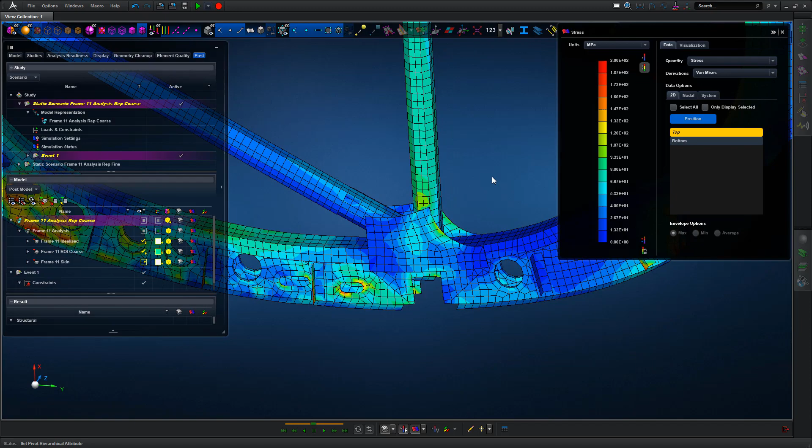So post-processing, first of all, for model representation 1, this is the coarse 10mm element edge length, which uses glued contact at the interfaces, and we can look at the stress levels developed, taking the skin out of view and setting the extreme stress limit to 200 MPa, and we can see the fringe that's developed at that level.

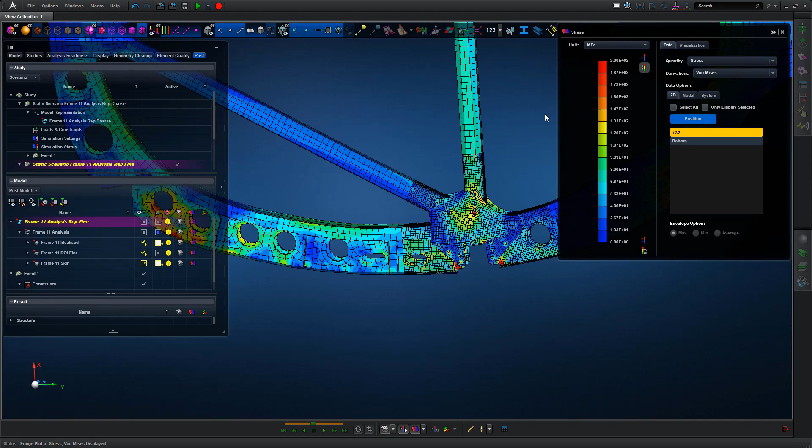And then we can repeat that, so we can simply double click and change the representation output type to the finer model, and taking the skin out of view, we can look at the von Mises stress, again setting the limit to 200 MPa, so we've got a like for like comparison, and we can see the change in overall model response. So again, two different representations contained within the same model architecture.

And again, depending on what we're trying to do, whether this is a loads model for screening, understanding load path, or a fine model for understanding detailed joint response and maybe fastener loads, or bearing bypass load between fasteners, we've got a good definition of that representation, and Apex is able to handle both model representations in a single representation model.